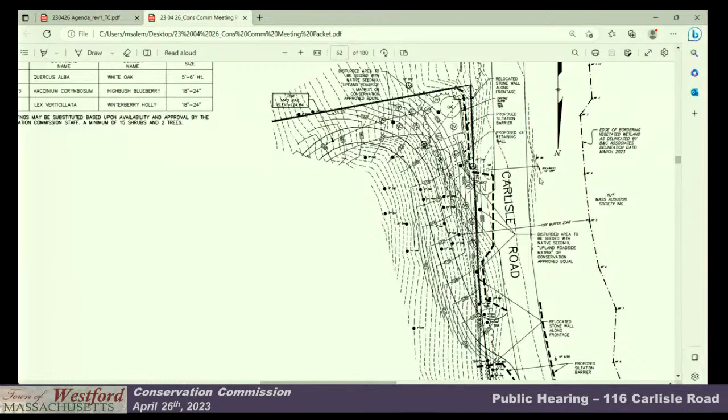Out of curiosity, because of the extra length, are you also looking at an increase in impervious surface? I haven't calculated the surface area of this, but it's a decrease of impervious surface in the 100-foot buffer. This whole area here goes away. This goes away too, but essentially that's being replicated here. This design quickly gets out of the 100-foot buffer, whereas the old one has a lot of extra stuff hanging out in there. So conceivably 200 times 12 square feet of extra impervious surface, but that's outside of the 100-foot buffer.

Some of it, that's one of the things we look at, impervious surface. So I've got to do something with that water. I've got to get all that water to lose energy, go into the ground, and spread out, getting it off the road before it gets fast. Right now in the winter, the 1 or 2 times I've had to spread salt in the last 5 years, it will slide like 200 feet down the road. So you can imagine how fast the water whips down there—it's a really bad design they did back in the 70s. The idea now is to catch all the water in catch basins, get it into controlled flow, and then get it to sheet out over undisturbed earth so it goes back into the ground.

I went out to the site this week, and I don't feel that the plan does justice for how steep the driveway is. You made it halfway up? Yeah, and then I saw Chris and turned around. I just used gravity, and I didn't even put it in reverse.

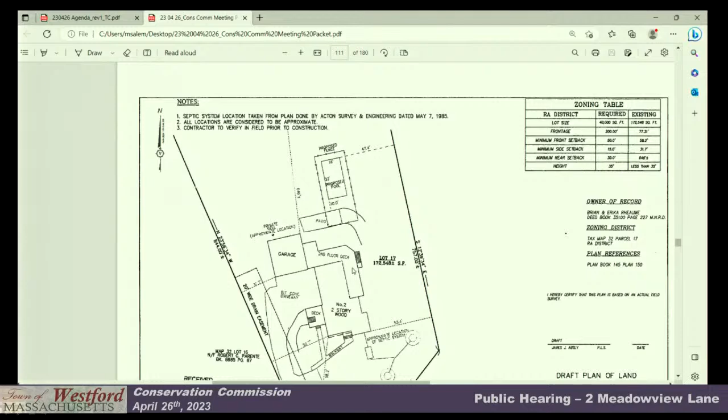So a surface discharge in this area would be okay? Yeah, so it would be outside the hundred feet. In terms of slope, it was all fairly flat back there, it was graded.

Okay, and then last question, where would you keep pool chemicals, things like that? Is there going to be a pool house or something to store that sort of material in? I haven't discussed that with them, but we certainly can make a note that they need to keep that product away from the area. The farther, so if it's over near where the discharge is, that vicinity would be better than towards the wetland.

Are you talking about a separate structure, or just putting it in the garage? The garage should be fine by me, I don't know where you're going to store it. It's always recommended to keep it in a cool, dry area, so not to leave it outside. It looks like they've actually got a salt chlorine generating system that's going to be producing chlorine using the salt in the water, so there will be very little chemical going into this pool.

It's going to be saltwater? I thought you said fresh. Well, I just looked at the contract and it changed, they did have it as a salt chlorine generating system. Usually the saltwater ones don't have a discharge then, you just change the cartridge filter. Right, you change the cartridge filter, but you don't backflush. No, a salt system can go on any filter system, it doesn't necessarily apply to the filter system itself.

So a salt chlorine generating system attaches to the plumbing of the pool and generates chlorine using the salt dissolved in the water. It has nothing really to do with the filter system. So do you have a discharge or not? You'll have discharge from the filter. It has nothing to do with the salt chlorine generating system. Oh, yes, okay.

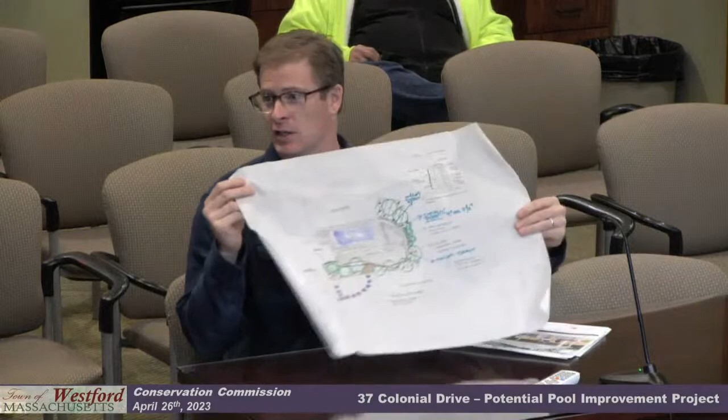Oh sure, I guess, yeah, we don't have anything to show, but... Oh, you have some out there? Yeah, did you get this too? Yes, and that little device has the orange button, little marker. Oh, there you go. All right, you're all digitized here.

I love it. So we have an existing pool. We love it, but there's no place to sit, so we want to extend. We have this PebbleTech system currently around the pool that's been there since we've owned it. I think it's original to the house. It's still intact, has not cracked, it's in great shape. We have no desire to take up the PebbleTech. We're just looking to create more patio space for my family.

So this was one of the proposals for the patio extension that the landscape architect Doug McQuaid drew up for us. We are close to, probably not going to say it as well as you, but close to the 100-year FEMA flood zone, and certainly we want to take that into consideration. So we're looking for suggestions and thoughts on how we could extend our existing patio.

Madam Chair, if I may. Mr. Fell reached out regarding the inclusion of, or enlarging, the pool deck area. The only jurisdictional resource within proximity is the 100-year FEMA flood zone, bordering land subject to flooding, at elevation 200. Looking at GIS maps and the topographic information the town has obtained on GIS, it puts the 30-foot buffer approximately in this general area at the top of the pool, the northerly edge of the pool.

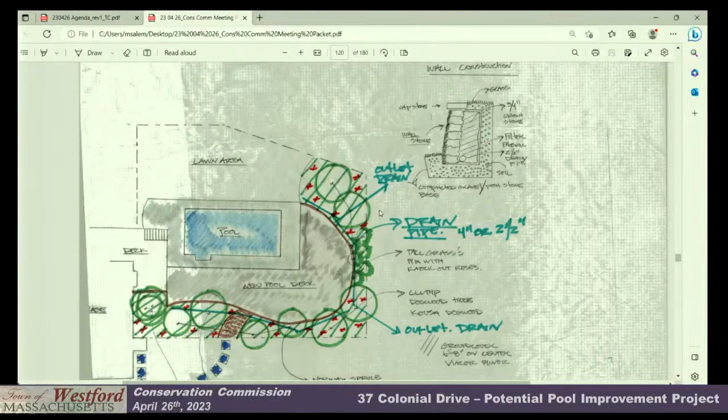We're totally open for suggestions. This was the first thing you came up with, and if we need to change it - I don't really personally like how it goes all the way to the edge of the pool over there. It's kind of too much, and it's just not really necessary.

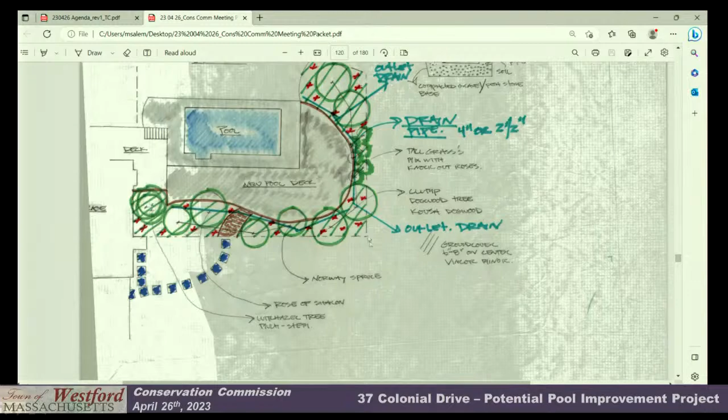Can you go back to the picture, Matt? So the retaining wall would be inside the fence, correct? That fence is clearly being blown down, so we have a new temporary fence. The retaining wall will be just on the inside of the new fence, and there are new fence lines - you can see it there, that pencil line. Yes, the new fence will connect with the existing black fence that's up now.

So it seems like most of this work is further away. As far away as it basically can be. And where was the boundary again, Matt? It's in the top of the plan, which is south.

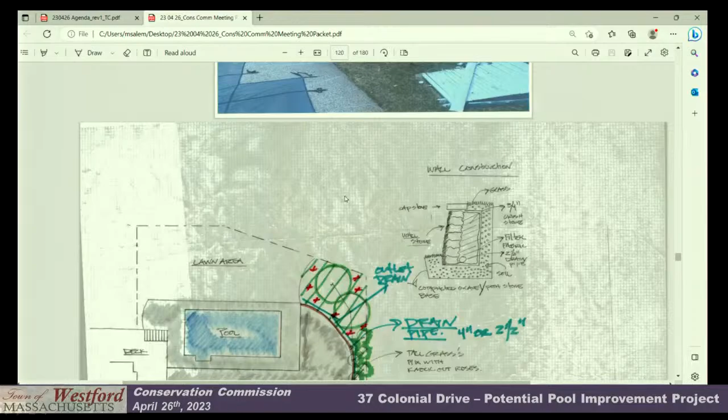It'd be nice to see it on the plan, but I don't really have an issue with the plan itself - it's just hard to get a reference on the concept, where I am. That's something I can certainly work with. As a pavilion is being proposed, a building permit is ultimately going to need to be filed for that, so I think it may be best to have a certified plot plan prepared.

When that certified plot plan is prepared, show the pavilion but also include the bordering elevation of the land subject to flooding, and that can give some context as to its location. But again, I think it is outside the existing fenced-in area for the pool. It's not like we'd be telling him to push it up that way - he's kept it away from where we told him to keep it away from.

There are no changes to the pool at all, right? No, not at all. I don't have any trouble - I think I've understood the commission's comments, and I can certainly work with the homeowner. We can certainly have this come before the commission ultimately for review and keep moving things along for the project.

We'll talk tomorrow. Okay, cool. Thanks for your time, appreciate the discussion. Yeah, you as well.

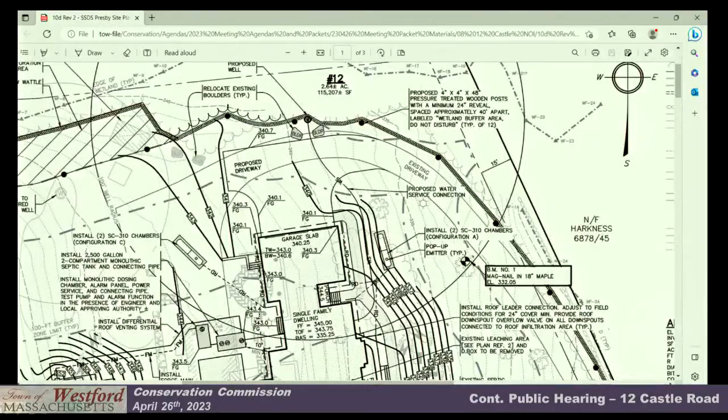So what you'll see is this angle of the driveway here. What that means is that this driveway is actually pitching from here to here, as we were talking about. So from the property line up to the turnaround, that averages anywhere from 6 to 8%. So 8% on a 12-foot driveway, that's a foot.

So to try to use my hands and arms, right now the driveway is pitched this way, house would be here. If we wanted to have the water flow here, what that would mean is if we held the wetland side of the driveway, we would have to excavate 2 feet to get below to reverse that pitch.

So I just suggested that the wording be every effort should be made to direct runoff towards the wetland. Just from a standpoint, cutting 1.5 to 2 feet out of this side has ramifications of catching up into the existing grading.

Now, you say well it doesn't all have to come off the inside, but if we do some sort of combination, we would have to raise the wetland side, which is already a very minimal shoulder, and then a steep slope down into the wetlands. So again, it's a decent idea, but putting it into practice may be more difficult.

So I suggested to Matt... So you're saying in some parts it may be feasible, in other parts it's not? Correct, and that's where I suggested every effort should be made to direct the runoff to the wetland, rather than a 5-letter word of 'shall,' meaning it has to happen.

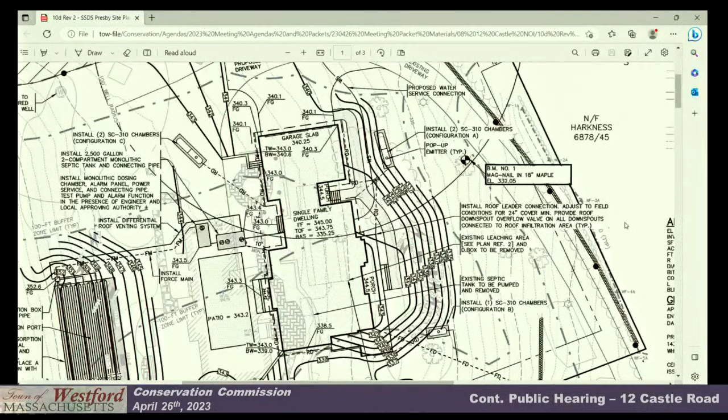So we have to, if it was repaved, it would be from the secondary cul-de-sac through what was disturbed. I don't think that we would meet the full intention of this statement.

So this is water coming down, is it water coming down the driveway, or is it water coming off the lawn next to the driveway and flowing across? It would, because of the pitch of the driveway itself, be the water that's from the grass adjacent to it hitting the pavement and then coming down. I will say it's the natural flow, natural drainage pattern.

I'll kind of go back to the 3 roof recharge areas. So we should have less water flowing down that natural pattern already.

It's just, unfortunately, this is high, this is low. There's an electrical box there, is that the issue?

Yeah, and that's down there. And what happens if the water goes on this electrical box? Does that take out electricity next door? Doesn't seem to be causing a problem right now.

Well, now, but right, we're here, we're here to make sure that we do everything. The electric, there's kind of 2 separate issues, okay, so you know, explain to me how it's not gonna go on the next door neighbor's property.

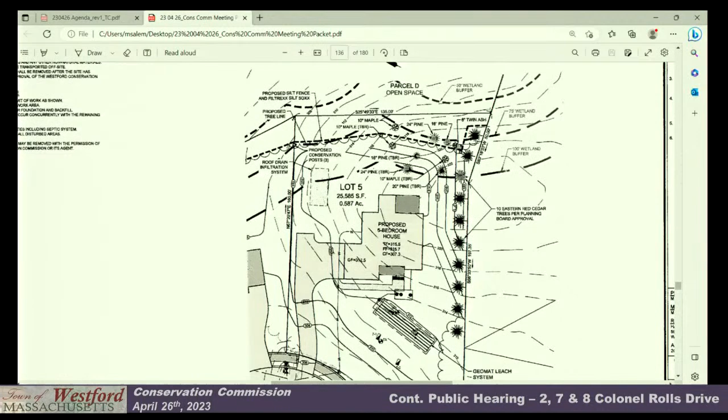One thing I could suggest is that we just cut them but not stump them, or we could leave them and hope for the best. I've got the limit of work on the outside of the trees, so if we want to keep them, we don't have to do anything.

So there's about 15 to 20 feet from those trees to the top of the new grade. I'm just thinking about disturbance to the root structure. I don't envision it being a big issue.

I showed them on the plan for discussion purposes. It's certainly a lot easier to get in there and cut them down before the foundation's in and before the house is built. We know how homeowners are after they move in, they have a little fear of trees. But I don't believe they need to come down now, and if you want to preempt any future discussion, it may be something you could take down now and just leave the stumps without disturbing the ground on that side.

You had a tree line marked in here - are those outside the tree line? No, they're inside the tree line. You're talking about this one up here? That's your 24-inch, there's your 18-inch. They're labeled TBR. There's a row of proposed trees along here.

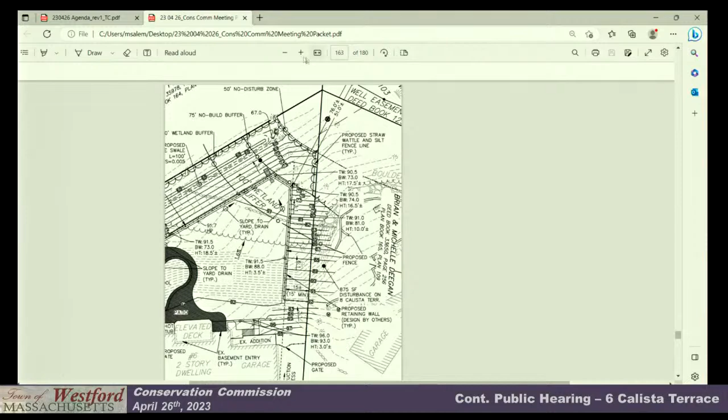As you can see, it's a 6-to-1 slope in that area, carrying down to a 3-to-1 slope toward the end of the retaining wall along that property line. From contour 87 down to 74 it's a 3-to-1 slope, bringing us right to the 75-foot no-build buffer line, from where we're able to catch up to existing grade. So that's option 1. Option 2 was a terraced wall option.

So this one does not include any work on the other lot, but as you can see here, it's not really much gain in terms of our perspective. It's 2 little terrace sections of wall that have to be under 4 feet per zoning. But beyond that, it's a 3-to-1 slope until we meet, I think it's elevation 77 on the plan.

Ryan has had discussions with the neighbor at 8 Calista, and they do prefer the graded option, option 1, that you saw first. Obviously, their project was before the board a couple of months ago. They're currently ready to wrap up with that project. Right now, they're just waiting for vegetative growth to come back, and optimistically they can probably go for their COC sometime in the summer.

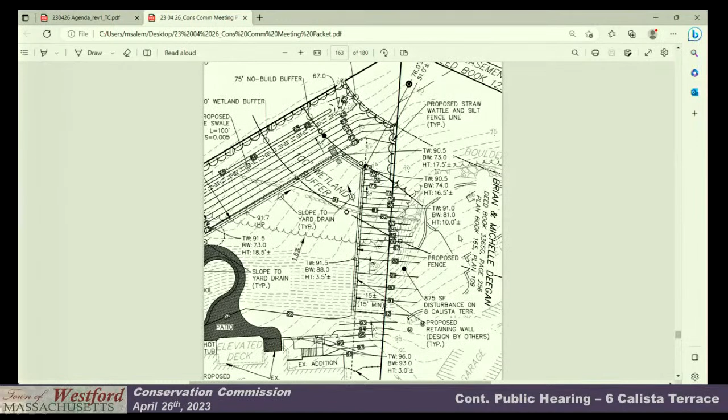Based on the conversations Ryan had with them, they would prefer to keep these 2 projects separate, and close out what they have done already with their patio project. Then if it would appease the board to go with this option, it could be included with this. We're here for guidance on how this works out procedurally. Do we add them as a co-applicant and re-notify abutters, or is this something else?

I know we discussed a minor modification, but if the Deegans are looking to close it out, yes, I think adding them as a co-applicant, notifying just the abutters to the new subject property, because we've kind of started down the process, you've opened the public hearing, notified abutters, legal notice, all that. We could certainly get an abutters list for Deegan prepared shortly, it's a 5-day notice.

So it certainly could get included with, on the May 10th meeting. Work towards notifying the abutters and putting in a legal notice for the meeting on May 10th. Continue this public hearing to then, when we open the new one, all new parties will be included in the public hearing process. Give a 5-minute overview as to what we're doing, and I can also have draft special conditions ready if the commission is satisfied with the graded design.